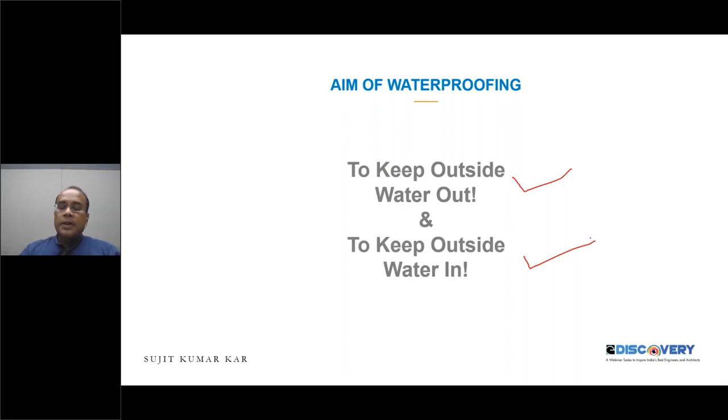Entering into the subject of waterproofing, it is very important to understand the aim of waterproofing. The major thing we all know is that waterproofing defines keeping the outside water out and keeping the inside water in. If there are no disturbances between the outside water and the inside water, if inside water will not enter outside, and outside water will not enter inside, then our structure can be called waterproof.

So why do we need waterproofing? During my 20 years of experience, I found that 90% of water leakages occur because of a 10% problem of the building. Because of this, waterproofing became a very vital subject.

Nowadays, people are still not 100% aware about waterproofing. For them, waterproofing is an additional cost, an additional wastage of money for the building structure. They can spend lakhs of rupees on flooring, tiles, and interiors, but could not spend even 1% to 2% of their total building budget on this. But if we sacrifice this 1-2% of the budget, we can make a very durable structure. We just have to take care of this 10% area - by investing just 1%, we can make our structure more durable.

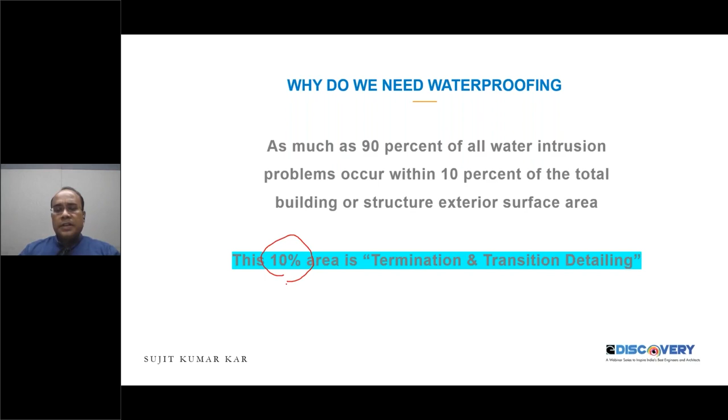Now let's understand how this waterproofing impacts things, how water droplets impact the structure. There is a study done from different sources that if you suppose there is a water particle having a weight of 0.05 gram of mass...

Sir, hello sir, some participants are not able to hear your voice. Am I audible properly? Could you increase the volume? I'm able to hear quite well. From my side it is completely fine, I'm at full volume, I'm talking in a very large way so there is no disturbance on my side. I think there may be some network connection issue from the participant side, so that is the probable reason. If somebody is facing an audio problem, I request them to check their internet from their side. You can check if the majority is able to hear me or not. Yes sir, you may proceed ahead.

Okay, what I was talking about - if we consider a water droplet having 0.05 gram mass, and if that droplet's weight is contacted with wind speed of 10 kilometers per hour, then the impact pressure of that water droplet on concrete is around 140 centimeter head of water. I mean to say, if we put a water height of 140 centimeters, the pressure that creates is the same kind of pressure this 0.05 gram mass water droplet will provide.

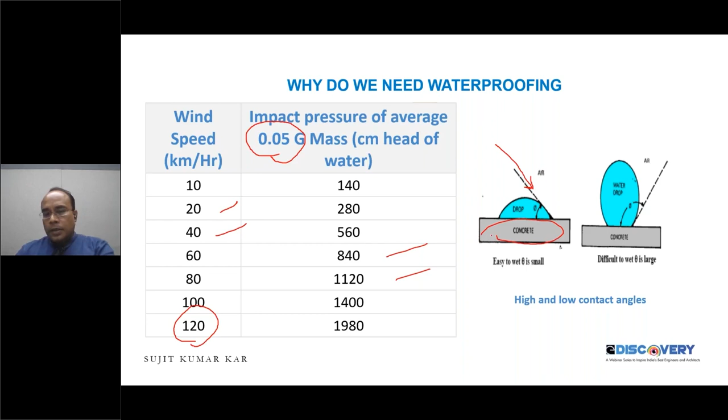So you don't know what the wind speed or air angle will be. This is not in our hand, but what is in our hand is to make the concrete structure completely waterproof. So what are the steps we can include to make our structure completely waterproof?

First is understanding the water source of ingress. During the investigation of the structure, our first objective should be to identify the source.

Then designing the system to prevent leakages. Our designing system should be a completely enveloped system, a combination of two or more systems. A single system of waterproofing will not give you 100% satisfaction, so it is very important to design a system that is a foolproof envelope kind of category. We will discuss all these things in detail in further slides.

The third step for a watertight structure is finalizing the design by properly detailing each individual envelope component into the adjacent component. It means if we are going for two to three different systems, it is very important to do the proper termination of each individual system.

If we are doing liquid applied membrane waterproofing along with another type, say membrane waterproofing, then the termination between the membrane waterproofing and the liquid applied membrane waterproofing should be perfect. Otherwise that area, that 10% area, will become a high water entering point, leading to high water leakages.

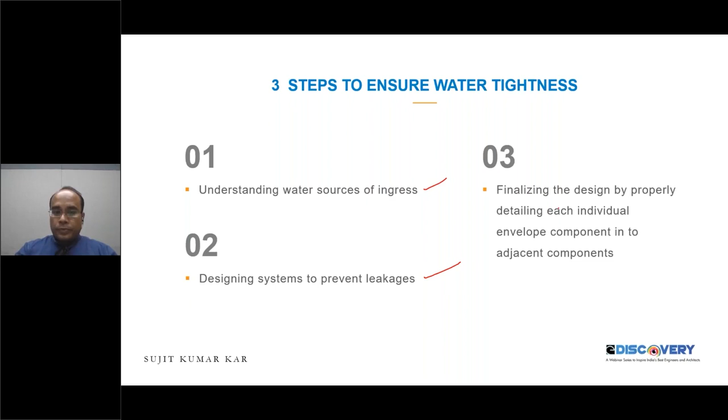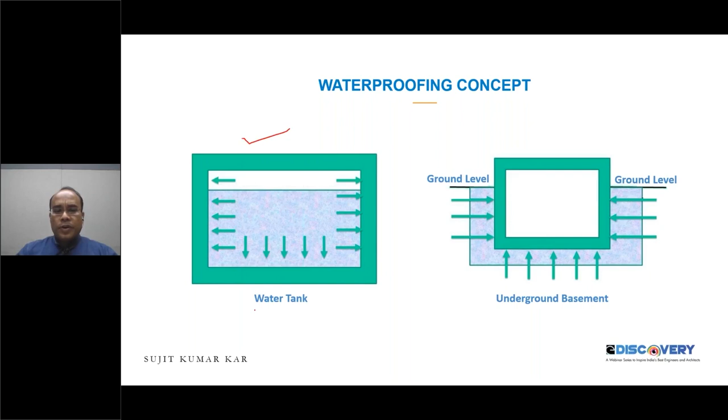Before entering into the technicality, let's understand some sign conventions of waterproofing systems. Here are two examples. First, a water tank - water is stored inside the tank, so the water always tries to come out. This is the inside of the tank and this is the outside. The inside water always tries to come out from the structure, and if there are any water leakages, you'll face them on the outside of the tank.

So in this case, the area where water enters is called the positive side, and the area where the water comes out is always called the negative side.

Now let's talk about a basement or underground structure. Nowadays lots of underground structures are coming up - even high rise buildings have two or three level basements constructed to avoid parking problems. In these conditions, the groundwater table always tries to enter the basement area. So this outer area is the positive side and the basement area will be treated as the negative side.

What is the objective behind showing all this? Where the water enters into the structure is called the positive side, and where the structure is affected is the negative side.

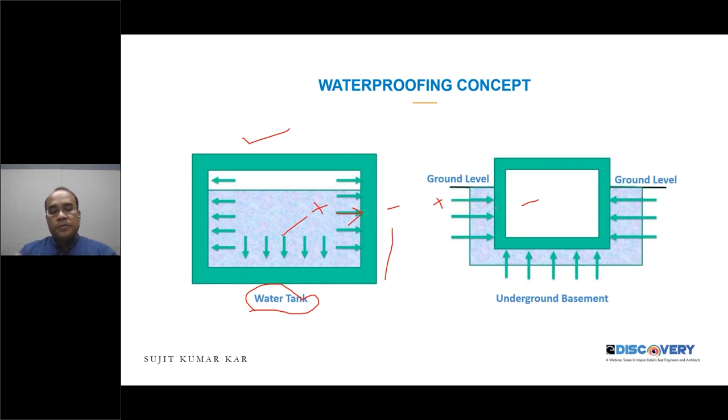Now what is the mechanism behind that? As per BS specifications, there are two kinds of waterproofing systems in the world, based upon two principles. One principle is called the pore blocking mechanism, and the second is called the surface sealing mechanism. We will discuss in detail what pore blocking mechanism and surface sealing mechanism are.

Here I have mentioned one word for Type B and for Type A. What Type B and Type A mean, we will discuss in the further slides.

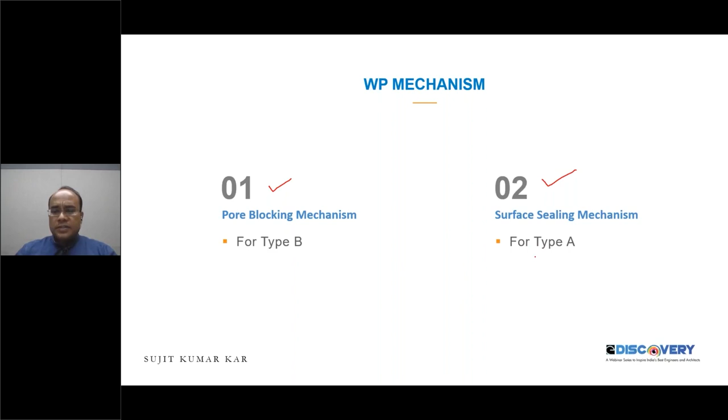Now, if we define our structure as per BS 8102, there are three types of structure. Waterproofing structure has been defined as per the waterproofing protection. Based upon the waterproofing systems, we can define our structure into three categories.

Now, if we are talking about type B kind of waterproofing, it is basically called the integral waterproofing technology. In integral waterproofing technology, we are adding certain things to the concrete so that the porosity of the concrete becomes less and the density increases, and because of that phenomenon, the concrete becomes more waterproof.

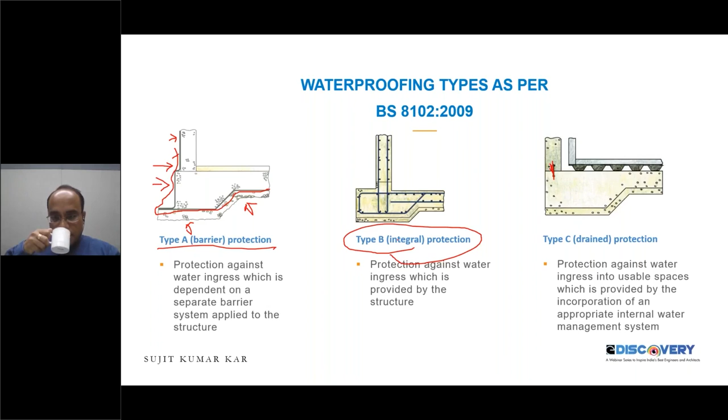So before discussing type A and type B, it is very important for us to talk about type C first, to understand the subject. Let's discuss type C first, because it is a very small thing, so let me finish type C first.

This type C kind of waterproofing is called the barrier protections. In this barrier protection, we take care of all the construction joints, and we take care of the water, how it will be discharged properly so that it will not affect the other structures.

Water is a very innocent guy, but it will be dangerous if it does not get its path to come out. So if we provide a certain path for the water to come out, it will not affect the other areas. This is the main reason we have to take care of this water type C barrier.

Now in barrier protection, what technology are we following? The first technology is PVC, called the PVC water stopper technology. We use PVC water stoppers in the construction joints when making big buildings with high water table areas, underground structures, water tanks, or any water retaining structures. In these conditions we can use this kind of PVC water stopper.

We are offering this for building structures as per BS 8102. There we can see three types of waterproofing systems we are offering nowadays to make waterproof structures. One is type A, where we are providing basically a complete barrier for the structure so that water is not allowed to enter into the concrete structures.

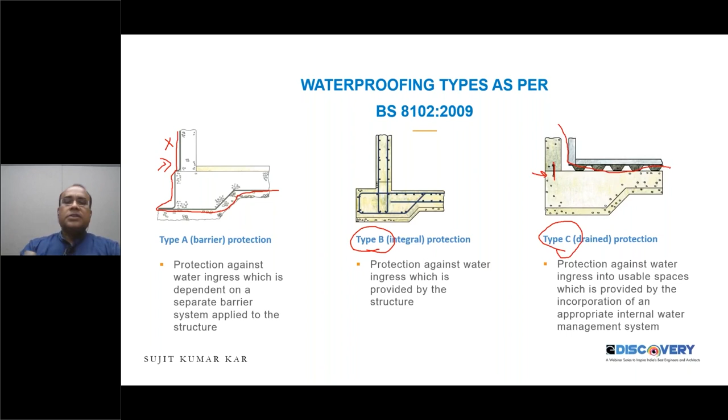Now, if we talk about this barrier protection type C system as per 8102, the first system that comes into the picture is PVC, where PVC is polyvinyl chloride. We use PVC water stoppers in construction joints or expansion joints or any joint area of the structure to prevent that joint area from any kind of water ingress, or to make it completely watertight. We can use different varieties of PVC water stoppers. I will show you the pictures in my further slides.

Then swellable type waterproofing. There are certain drawbacks of these PVC water stoppers. Because of that, we can use swellable type systems, which are basically 10mm by 10mm or 20mm by 20mm in dimension. When we place this system in the construction joint, and it comes into contact with water, it swells and minimizes the gap, so water will be blocked and it provides a completely barrier system.

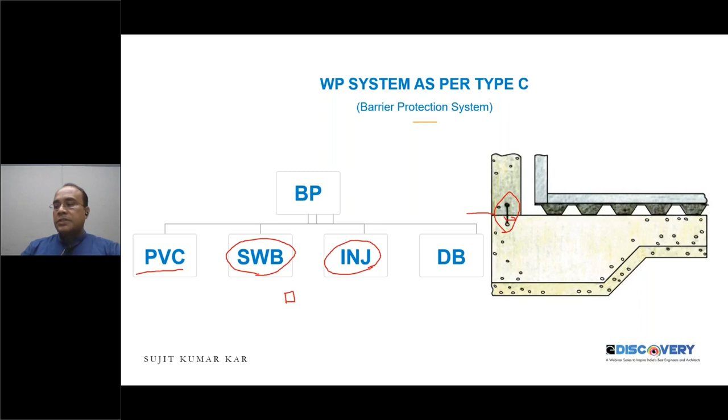Another barrier technology, very popular and advanced nowadays, is called the injection system. Some injection systems work as a barrier, though some injection systems work as a pore blocking mechanism. But the injection system I am talking about here is for barrier protection, which is a very latest technology. I will show you how this injection system works as a barrier system to prevent water leakages through any kind of joints.

Then another system is called the drainage board. Through this drainage board we allow water to flow through a channel, providing a dedicated route for the water to move on, so it will flow regularly and not affect the concrete structure, keeping our structure safe.

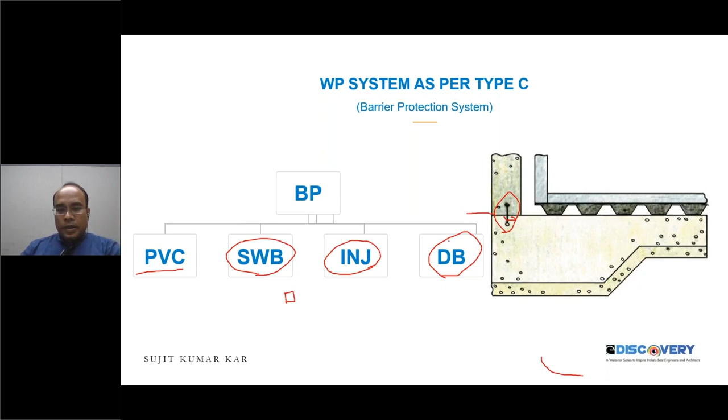Now let's discuss each individual system - PVC, swellable and injection system, and the drainage board - in detail. Here is the picture showing this kind of system, this is the example of PVC water stoppers. Most technocrats know this very well, because it's a very age-old technology we use nowadays to make our structure a barrier waterproofing system.

Now the installation procedure of these PVC water stoppers is like this: half of the portion will be cast with the previous cast, and the second part of the PVC water stopper will be cast with the next layer. Because of this long and corrugated path, water will not be able to penetrate through all these contours, covering all the contours and making the joint happen.

The advanced system is this kind of swellable water bar, where these swellable bars are placed using adhesives or by making grooves, and when the second lift of concrete is cast, it becomes completely embedded in between the joints. When water enters in future wherever there is a weaker section of any joint, and comes into contact with these water stoppers, it swells up to 30% to 40%, with a very controlled expansion during 48 to 72 hours.

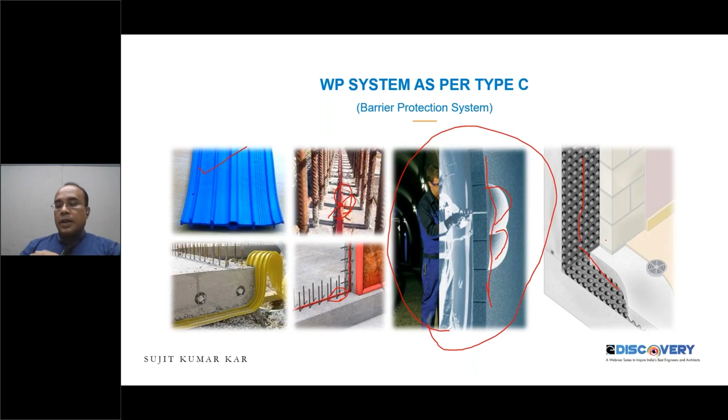And these are examples of drainage boards, where we allow water to come into the drainage board, and it provides a particular passage for all the water to flow, so that this water will not affect the existing structure. Now this is the injection technology, what I was trying to explain to you as a barrier protection.

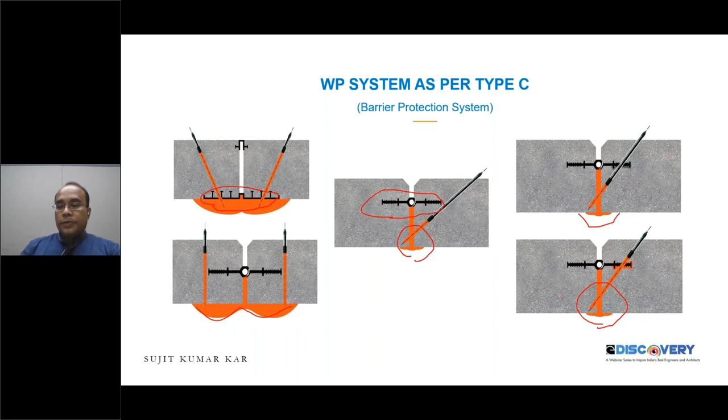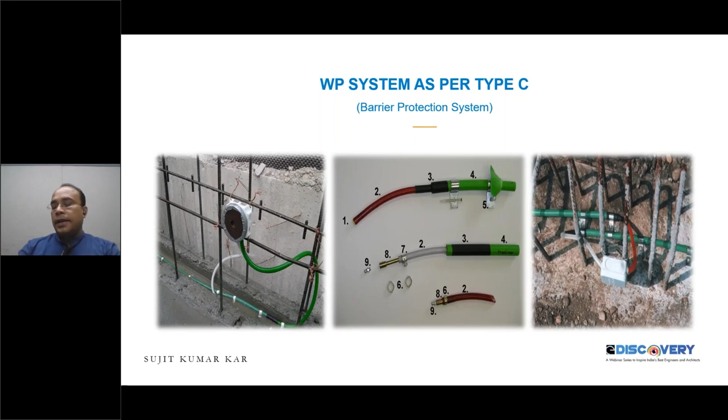Then another type of barrier system, which was used in very ancient days, but nowadays its usage is very minimized because of some drawbacks and other things. They are called pre-injections, by providing a pre-injection source. Through the construction joints, they were providing certain kinds of pipes, called pre-injection pipes, which have different kinds of small holes, and there they inject certain kinds of water-based methyl methacrylate gels, or methyl methacrylate based resins, so that all these construction joints where there will be leakages can be taken care of, and they can seal the entire part. This methyl methacrylate is soluble in nature and very water miscible, and it can take care of the construction joints.

Now let's talk about the main subject of waterproofing where we are here. Basically, let's start with the pore blocking mechanism. Now, if we're talking about the pore blocking mechanism, as I told you, it conforms to Type B waterproofing as per BS 8102. In this waterproofing, various technologies are available where we are minimizing the porosity of the concrete. Now just imagine, if there is certain porosity in the concrete, and if by any means we can minimize the pores, definitely it will not allow water to go through the concrete structures, and our concrete becomes highly waterproof.

So to overcome this particular issue, we can go through different waterproofing systems. Our first waterproofing system is called the integral waterproofing system. In the integral waterproofing system, there are two varieties: one is the liquid integral waterproofing compound, and one is the powder-based integral waterproofing compound. Nowadays, our Bureau of Indian Standards has specified this integral waterproofing compound in IS 2645. This kind of integral waterproofing compound minimizes the porosity by 8% to 10%. In certain cases, it can go up to 15% also.

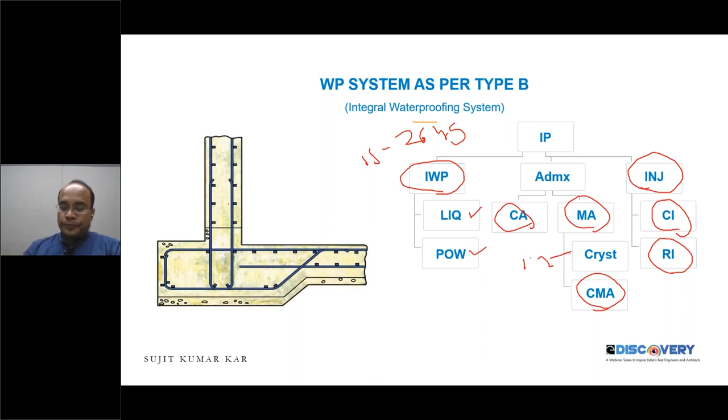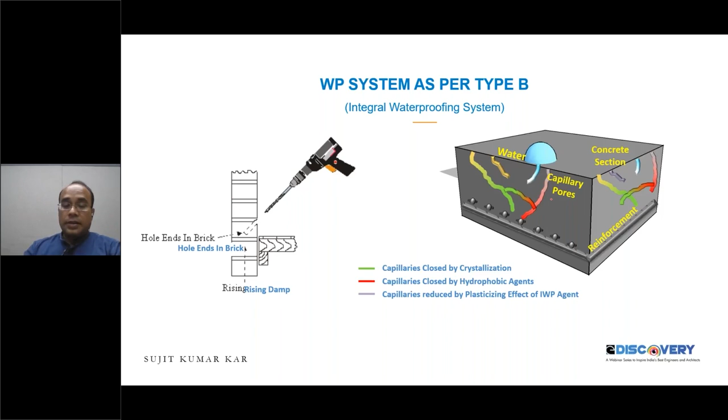Now, there are certain integral waterproofing systems available in the market, which conform to IS 2645, and you can inject it or mix it into the concrete to get all the things done. You can minimize the capillary pores and minimize the porosity, and get your job done. Now let's come to the main cream of the subject, which is called the surface sealing mechanism.

This surface sealing mechanism we can divide into two parts: one is the membrane systems, one is the liquid applied membrane system. Now let's discuss each individual chapter in detail. Here we are talking about barrier protections.

Let's talk about membrane waterproofing. Generally, for building structures, starting from small buildings to high-rise buildings, if you are talking about any kind of good quality waterproofing from different soil categories or different foundation categories or different water table categories, every engineer prefers to use membrane waterproofing for the basement work basically.

So in the membrane systems, what technology is nowadays widely used? One is the PVC technology. There are PVC membranes, and in the PVC membranes it is basically a loosely laid system. We will discuss, I will show you some photographs also.

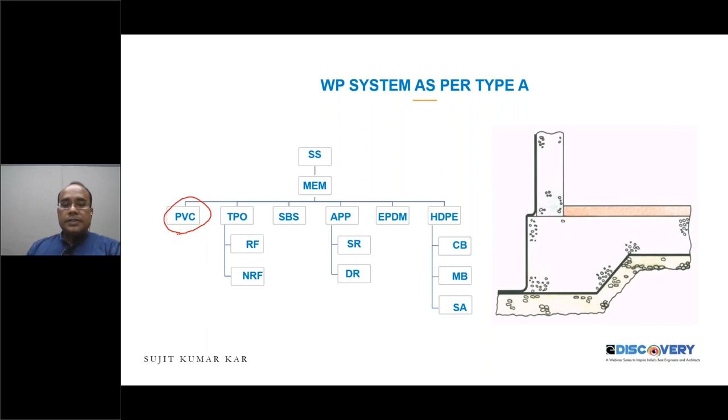And there are some TPO membranes. TPO is good in UV resistance, whereas PVC is not good in UV resistance. The difference between PVC and TPO is that TPO is more of a green product. So if the building is subjected to any kind of green category, then definitely they should recommend TPO membrane. TPO stands for thermoplastic polyolefin.

There are two varieties of TPO membranes available in the market: one is the reinforced TPO membrane and one is the non-reinforced TPO membrane. Where your structure is subjected to heavy tensile force, in that condition you can use reinforced based TPO membrane. And where the structure is not subjected to tensile force, only needing TPO membrane for waterproofing purposes, then you can use non-reinforced based TPO membrane.

This TPO membrane, like PVC membrane, is always subjected to the loosely laid system, but TPO has got various options. You can make it a loosely laid option, or you can make it a fully adhesive system. In certain cases TPO is always recommended because of its UV stability, which is a plus point - it is recommended for exposed conditions also. So where there will be any exposed conditions, you can go for the fully bonded systems.

And there are certain systems also available called SBS systems - it is a self-adhesive system, basically used for basement waterproofing or exposed area waterproofing kind of thing. And APP is very popular in India, atactic polypropylene systems, available in 3 mm, 4 mm kind of thickness. This APP atactic polypropylene system is available in two types: one is the single reinforcement type and one is the double reinforcement type.

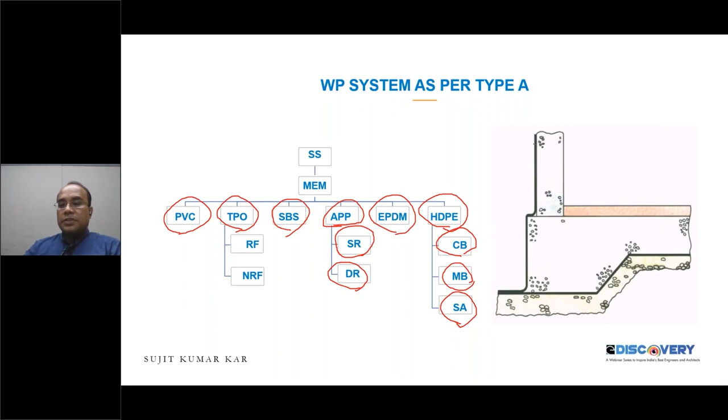The objective of all these membrane systems is to provide a barrier on the positive side of the structure so that it prevents water from penetrating. Now let's have a quick look at all these systems.

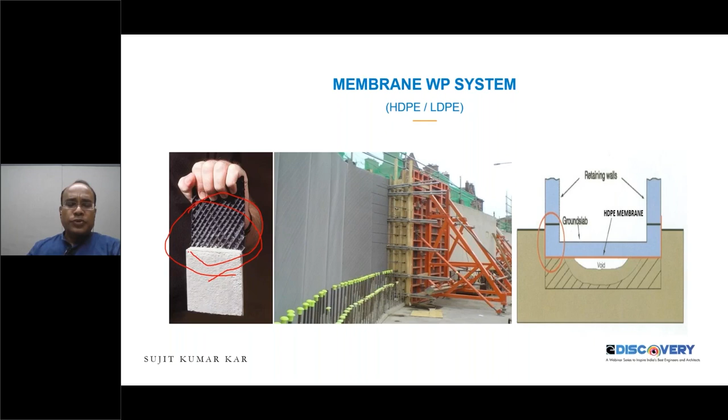Another plus point of this mechanically bonded system is that you can use this kind of membrane in confined areas where access to the positive side is not possible during construction. In Mumbai kind of areas, which are very constrained, it is very difficult to do positive side waterproofing. In those conditions, this kind of waterproofing gives very good results.

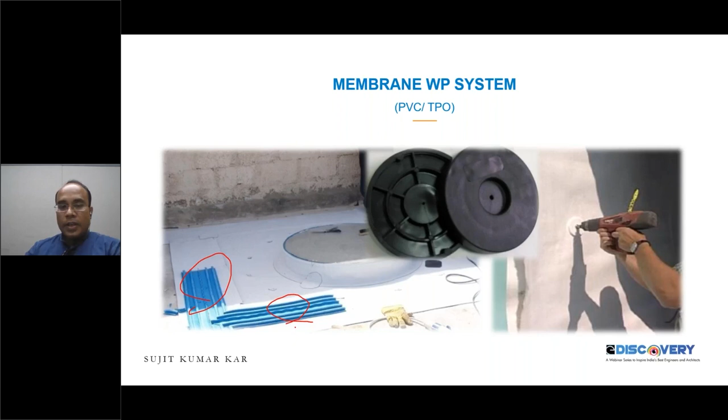This is the welding procedure for the two different joints, because as I told you, for any waterproofing system termination is very important. If you are talking about a membrane system, the joints are very important because they are the weakest area. In case of PVC and TPO, it is completely welded with the help of this welding gun.

And you can do the checking also. There are various checking mechanisms available. Because of time constraints, I am not going into detail, otherwise I could show you videos of how this checking is done.

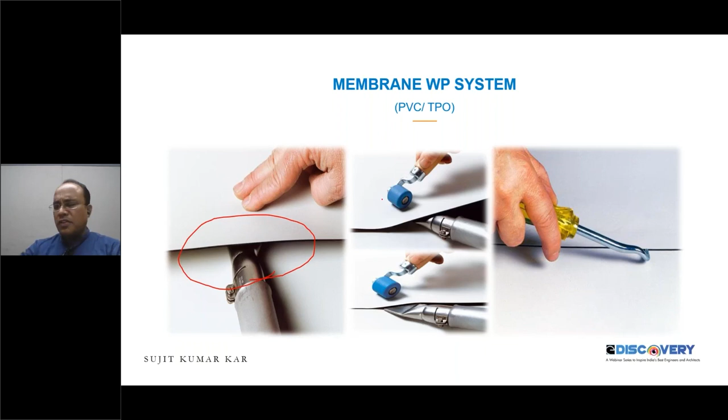There are various methods available, but it is a very effective system, and the overlapping between these two membranes is approximately 50mm, you can say 50mm to 75mm, basically depending upon the type of structure. These are the welding machines for small applications - hand welding machines you can use, and for basements and larger areas, automatic welding machines are used.

If there is a high water table area, or if you are doing waterproofing for heavy water retaining structures, then for that kind of area you can go for the double weld machine, so that it will weld the joint two times, giving double welding.

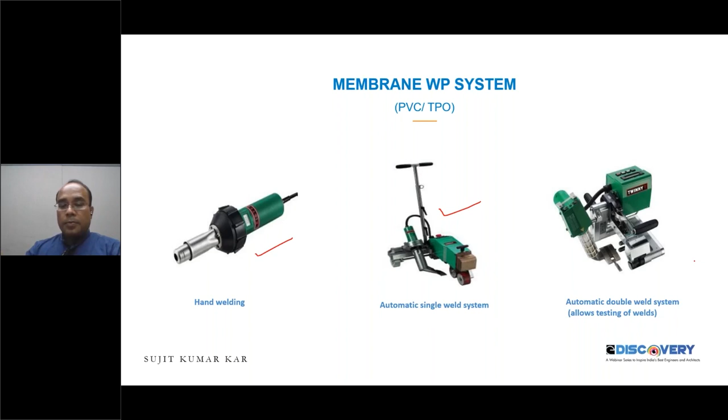After these terminations, you can weld here. These are the welding areas. So more detailing, depending upon the site, all the detailing can be designed. This is just an example, but from site to site we can design it in detail.

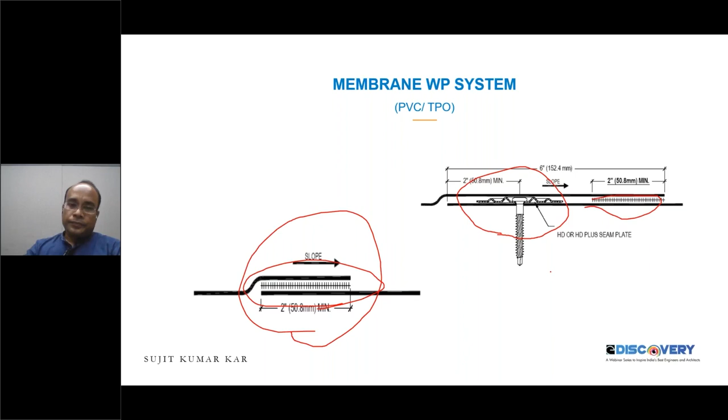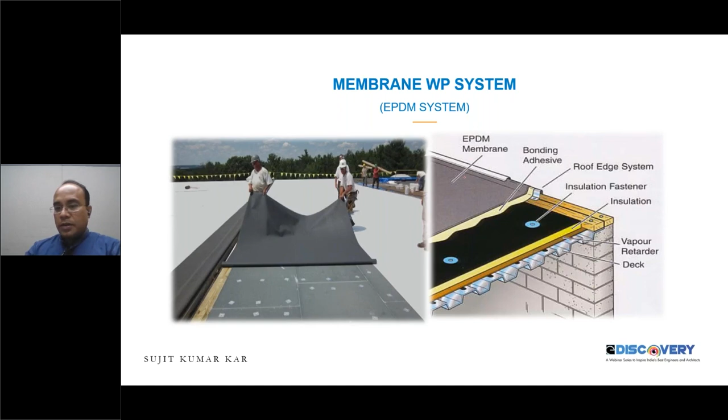For the fully bonded system, two types of adhesive are used nowadays. One is the bonding adhesive for better bonding of the EPDM with the concrete substrate, and another is called the splicing adhesive, which is recommended for the overlapping sections between two membranes. These are the systems we recommend for exposed areas where EPDM membrane is applied.

Now this is the system of APP membrane. This is the structure of an APP membrane, and it is subjected to different kinds of layers. In the first layer, it is the APP polypropylene membrane, and over that you can go for the mineral substrate, or there will be sand finish or plain finish.

There will be reinforcement, and it should be maximum 120 GSM to 150 GSM. Various types of reinforcement are available for the APP system, glass fiber reinforcement or polypropylene fiber reinforcement, anything you can go for. Then in the bottom part there will be a thermal fusion film.

People use torches to burn that film, so that it will stick completely with bitumen-based primers. Before application, these bitumen-based primers will be applied so that it will be completely bonded with them.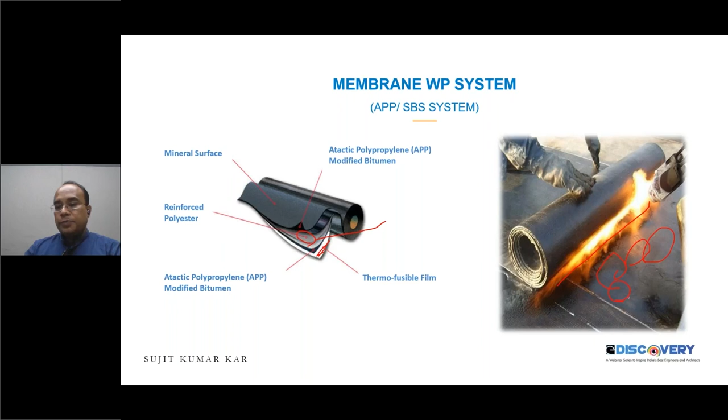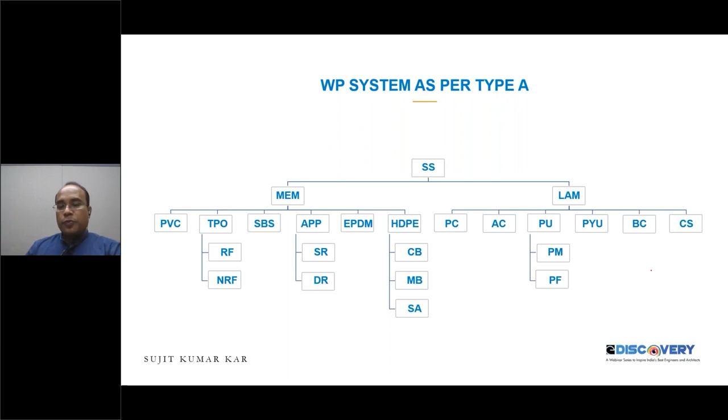Now if we talk about the surface sealing mechanism, which is called liquid applied membranes, this kind of surface sealing mechanism is highly popular for any kind of superstructure waterproofing. All membrane waterproofing is recommended for substructure waterproofing, and for superstructure waterproofing we use surface sealing.

So let's talk about liquid applied membranes. For the regular membrane system, very popular nowadays and used by every construction chemical manufacturer, this is called polymer modified cementitious coating. Another system is called acrylic coatings, and there are PU coatings too. Among PU coatings, two varieties are available: one is polymer pitch modified, and one is pitch free.

There are also polyurea systems for liquid applied membrane waterproofing, bituminous based coatings, and crystalline based coatings. So these kinds of systems are already available.

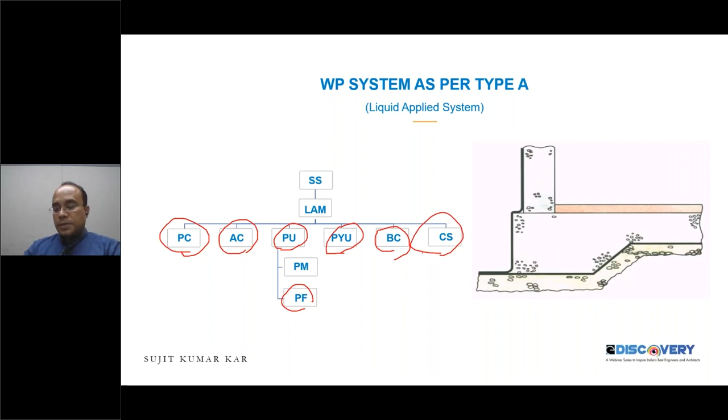So what are the expectations from liquid applied waterproofing we should have as technocrats? Any liquid applied membrane waterproofing should have good carbon dioxide resistance to minimize the carbonation effect, and it should be breathable so that the durability of the coating and membrane increases, and because of its breathable nature, the bond strength between the concrete and the membrane stays intact, increasing durability.

It should have good crack bridging ability, so there should not be any cracks, increasing the durability of the membrane. It should have good water resistance properties, and definitely good UV resistance properties if that membrane is subjected to UV exposure.

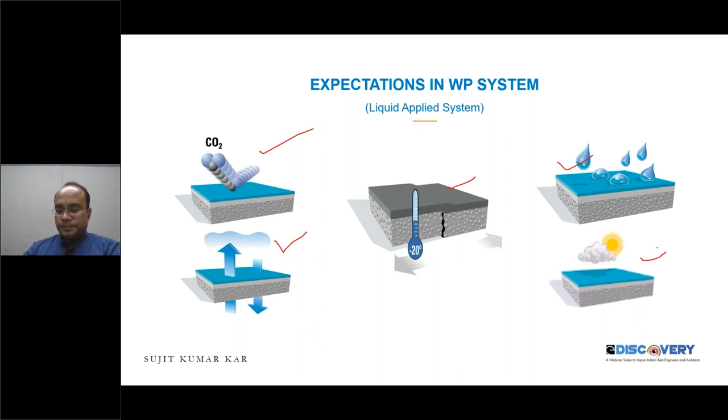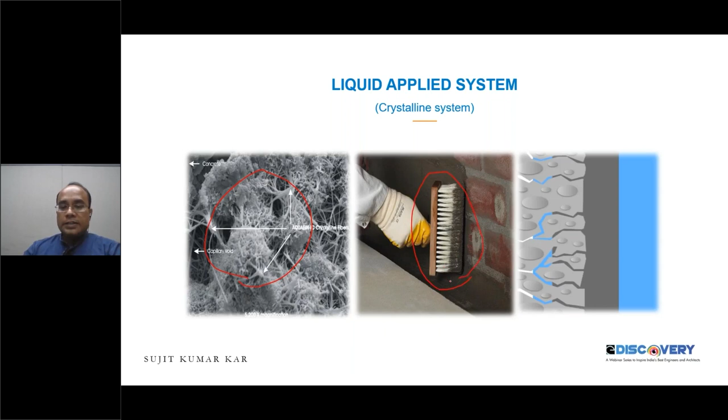And it is always very effective if you use crystals with this kind of brush instead of any kind of paint brush. This is the example.

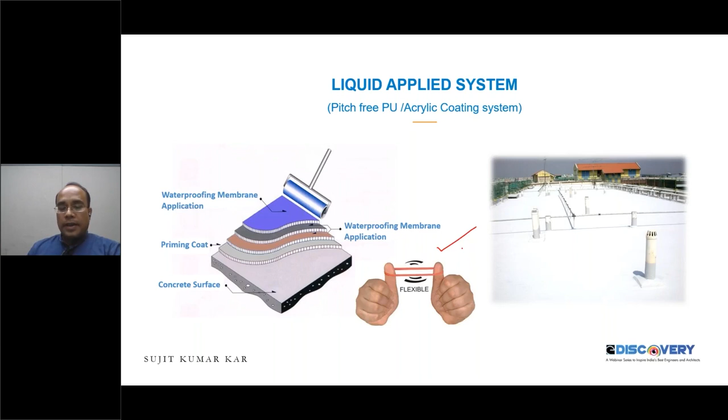Exposed pitch-free or acrylic coating systems are very good in UV resistance. In this category you can get any kind of PU coating or acrylic coating, recommended in 2 or 3 layer systems. It has good flexibility, good UV resistance, and can take normal foot traffic. But if your surface is subjected to high mechanical loads and abrasion, this kind of coating should not be recommended.

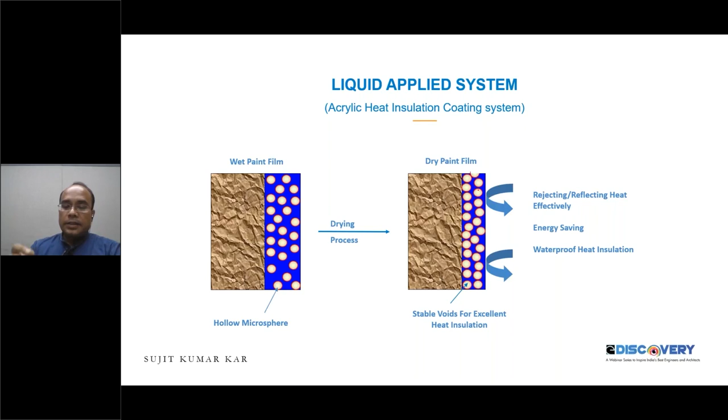Now there is another system, including waterproofing, called heat insulation coating, which is very popular. The heat insulation coating structure is filled with microspheres, so when it is subjected to heat, it reflects it, minimizing the heat to a very good standard.

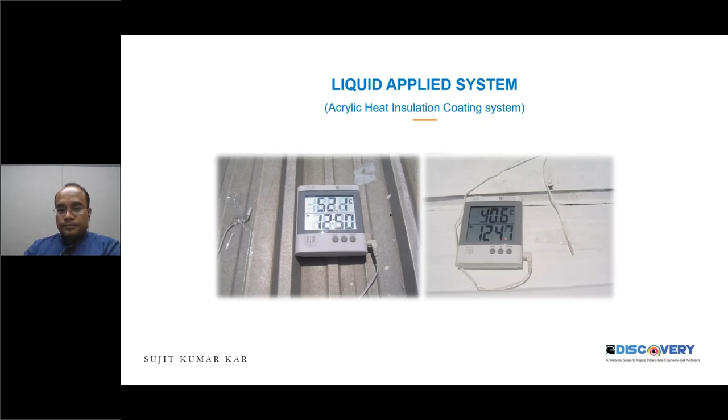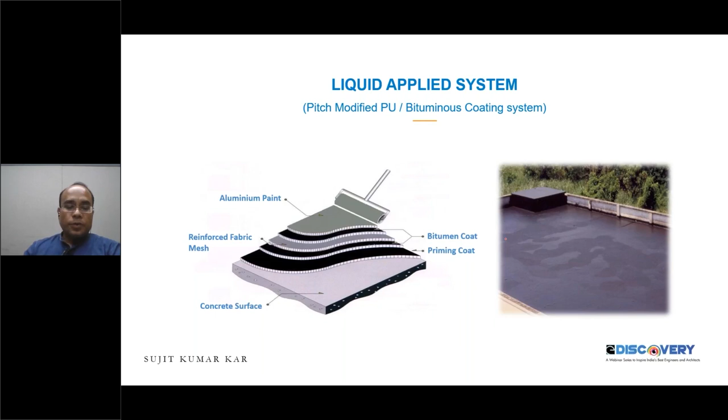Now there are some pitch modified coatings and bituminous coatings that are not good in UV resistance. You can still recommend this kind of coating, but it should be covered by a particular screed so that the UV will not degrade its physical properties.

But the application procedure for all systems is the same, and this is a very popular system nowadays. Every construction company is using it, which is called the polymer modified cementitious coating.

It's available in two parts: one is a liquid polymer and one is a powder component. When this liquid polymer and powder component mix together, it makes a slurry, and after doing the application, this film will be formed, and it is a flexible film. So it is also flexible.

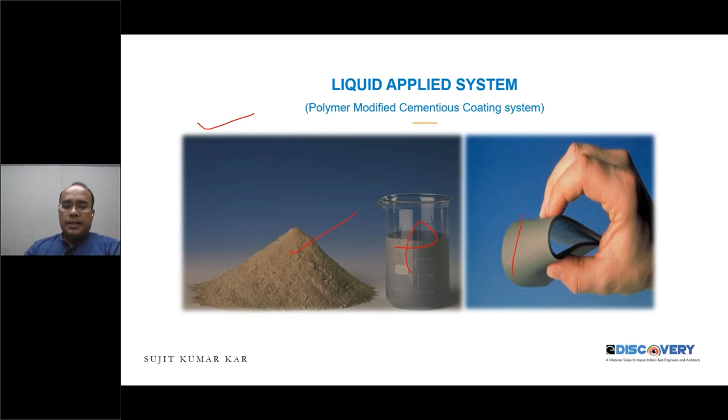It can provide 1mm to 2mm thickness, subject to the type of material you are using, and this flexibility is very high—it can do crack bridging up to 1mm. Now, this is the way you can use this polymer modified cementitious coating application.

This is after mixing the powder with liquid, it looks like this, and once you apply it by brush, it spreads all over the area. You can take care of all the joints by applying proper joint treatment methodology, and you get an unbreakable film, so you get the best benefit out of it.

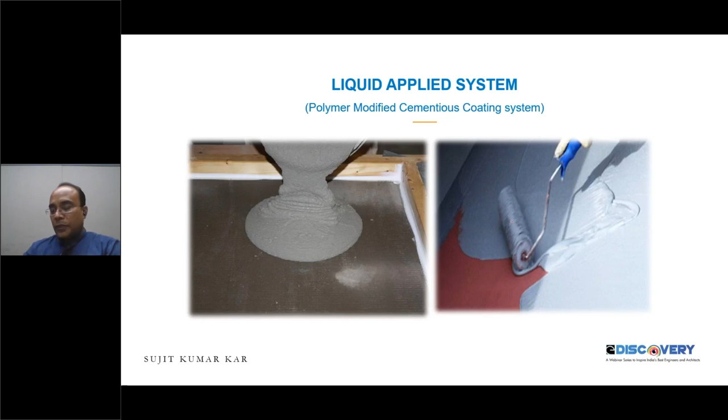But the only drawback is you cannot keep it exposed for a longer period. It is not good in mechanical resistance, so it is always preferable to use a screed over that particular kind of coating, and then you can go for other things.

Then another technology is the polyurea technology. This polyurea technology is a very advanced technology nowadays. If you ask me what is the setting time of this polyurea, I will say it is just 15 to 20 seconds. The major part of this particular system is these machines.

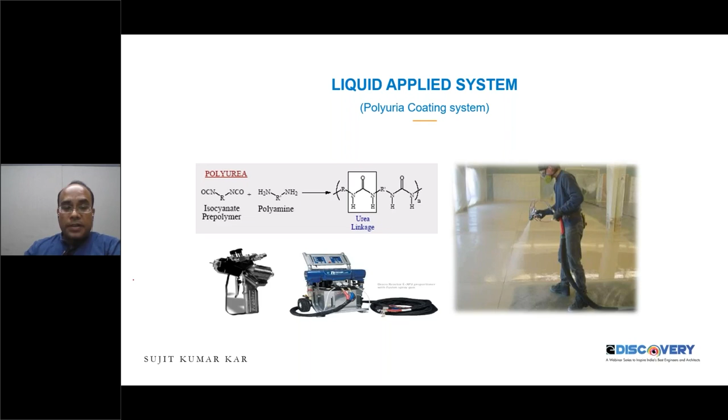This is a spray gun, and this polyurea coating is very precious. It is a two component system, and it is heated up to 85 degrees Celsius before mixing, and it mixes in the nozzle. Once component A and component B mix, it sets immediately. It is a very good latest technology you can use, and it has good UV resistance properties.

Now there are different types of polyureas available: pure polyurea, hybrid polyurea. You can use any kind of detail, but I am not going into detail—it is a very big subject. We can discuss this separately.

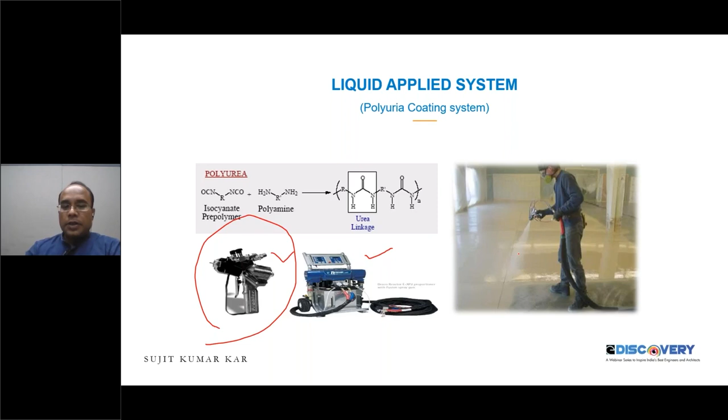So finally, these are all the systems we are talking about. Now, what is the conclusion of all these things? If we would like to go for a foolproof waterproofing system, the first important parameter we have to consider is the coordination.

Coordination between the architect, the waterproofing expert, and the contractor is always important when we talk about foolproof waterproofing systems. We should take care of the waterproofing contractor, the technology, the termination part, and the waterproofing quality. This coordination is very important.

Compatibility is also a very important concern to consider. We should collect waterproofing material from an ideal source, not run behind local dealers or local products just because they promise 15, 20, or 25 years of warranty. Don't go by that, because every product is good, but unless it is compatible for your requirement, it will not work.

Then continuity. Waterproofing systems should always be in an envelope system, not a partial one. If there are water leakages in the roof, you should waterproof the entire roof, not just the particular area where water is leaking. We should always provide combination systems, because a single system will not work everywhere for every structural application. For different structures we should go for different systems; we cannot use a single waterproofing solution for the entire building. We have to take care of this.